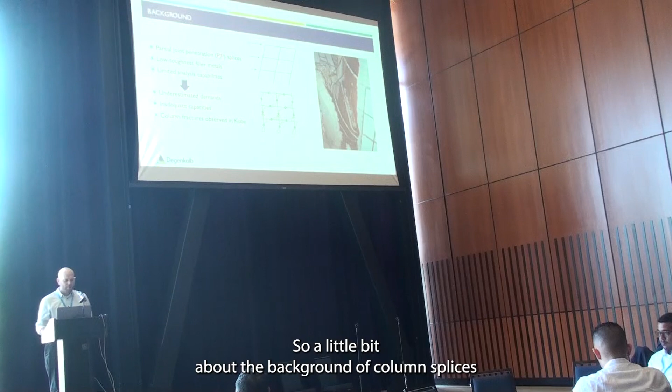Some background on column splices and why we're interested in evaluating them: prior to the 1994 Northridge earthquake, there were very few requirements in the building code for these connections. As a result, engineers provided the most cost-effective solution to create these joints, which resulted in partial joint penetration welds between the flanges and the webs.

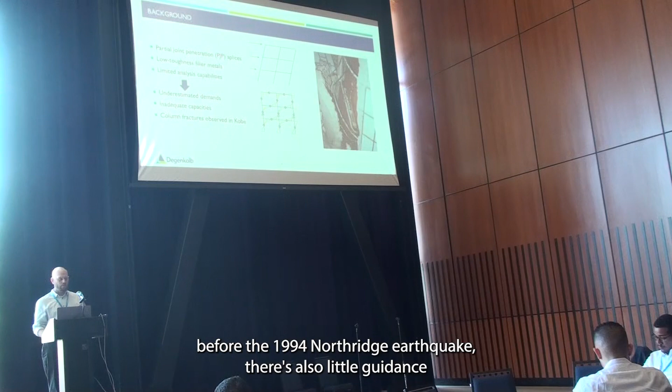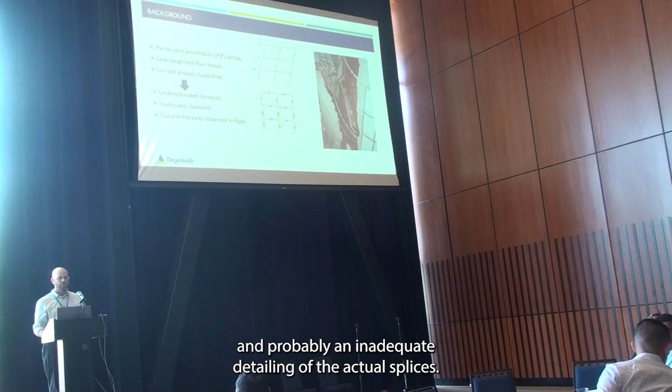Since there were few code requirements before the 1994 Northridge earthquake, there was also little guidance on the toughness requirements for the filler metal. The combination of those two things likely led to inadequate detailing of the actual splices.

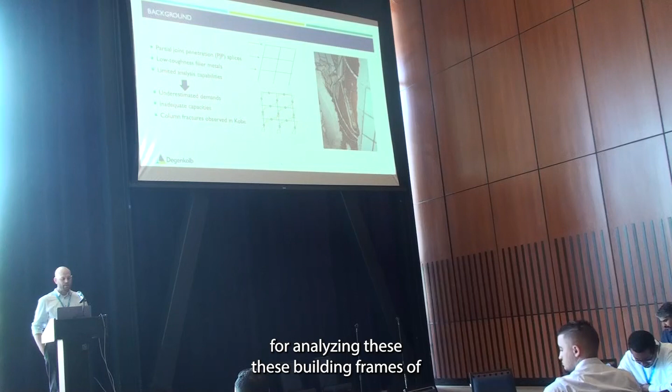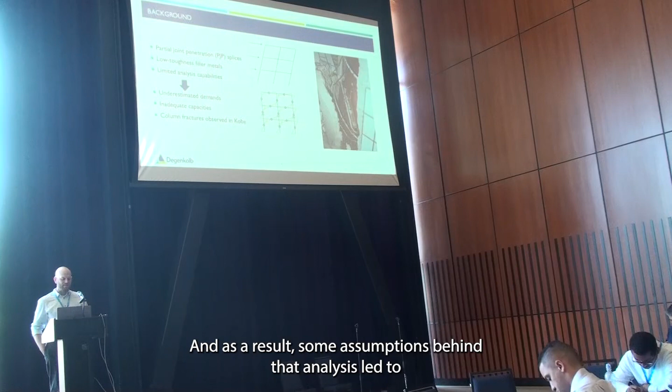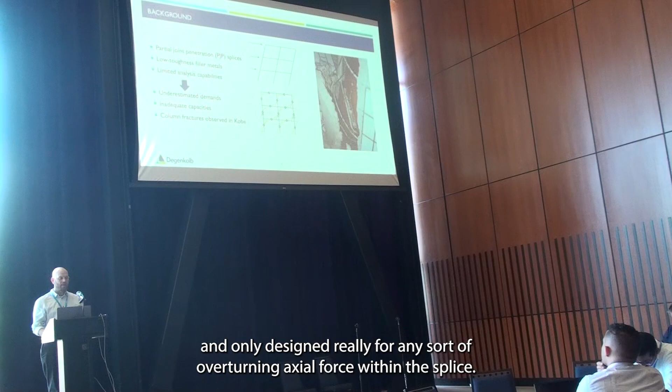For earlier buildings, prior to the availability of commercial software packages for analyzing building frames, approximate methods like the portal method were used to design these frames back in the 1970s and 1980s. As a result, assumptions behind that analysis led to splices being located at inflection points to minimize flexural demands across the splice, and they were only designed for overturning axial force within the splice joint.

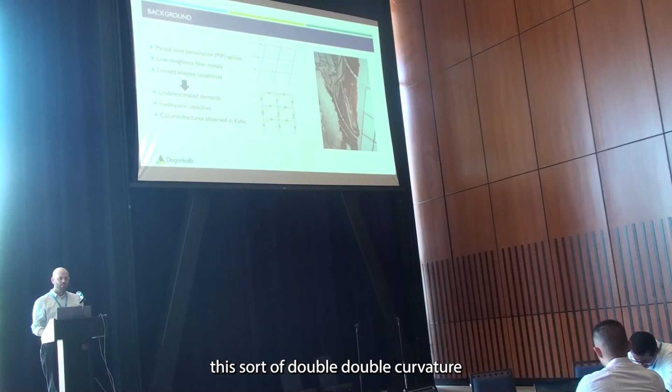Research has shown that, especially in larger, taller buildings, this double curvature assumption in the frames may not be accurate. There could be cases where a column undergoes single curvature, and the splice would have large moment demands at the joint.

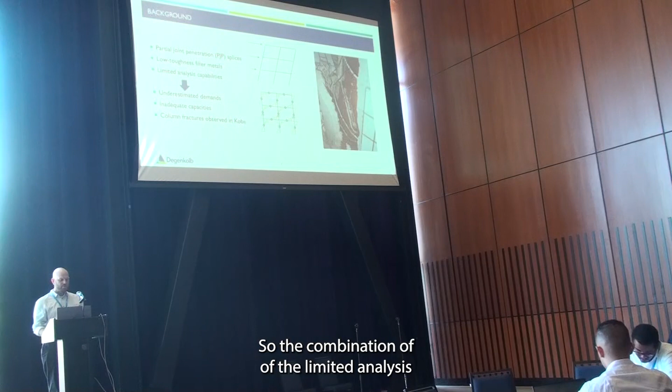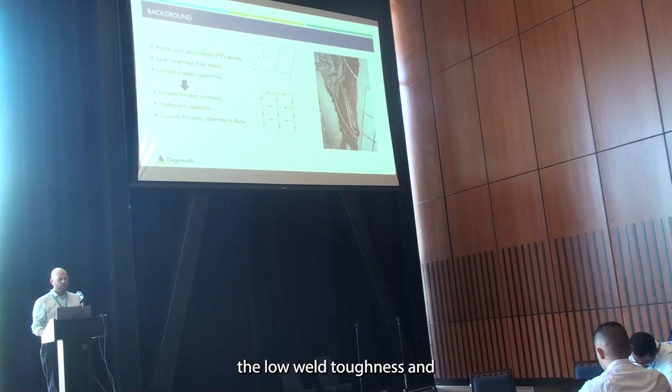So the combination of the limited analysis capabilities used previously, along with low weld toughness and limited capacities provided at these joints, results in brittle fractures at these connections when they undergo strong ground shaking. This has been observed in earthquakes like Kobe in 1995.

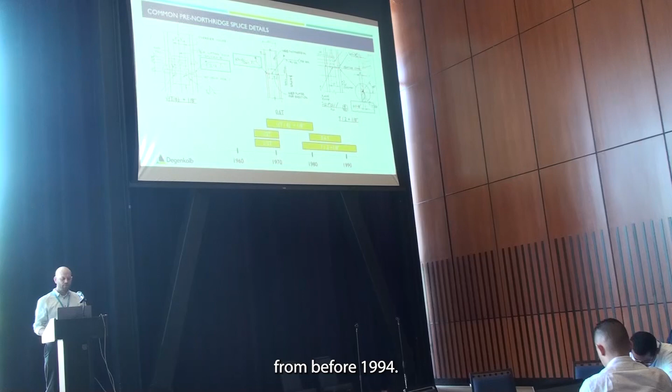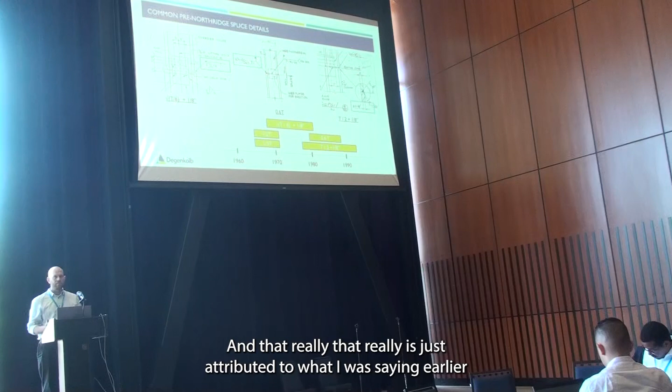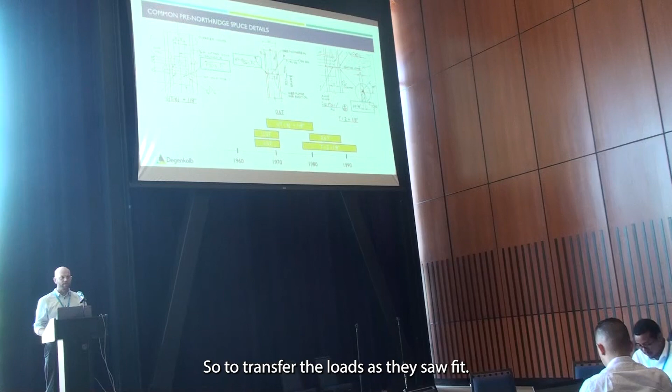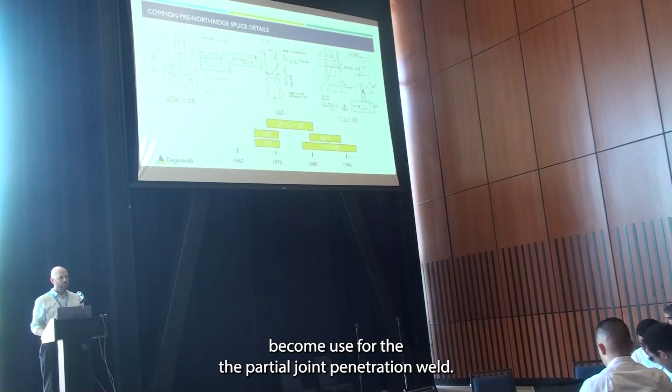This slide highlights what we see when we look at existing building drawings from before 1994: a lot of variability in the detailing of how these partial joint penetration welds were done. That's attributed to there not being a lot of specific guidelines behind these connections, so engineers could choose how they wanted to detail them to transfer loads as they saw fit. At the bottom of this slide, I illustrate a rough timeline of when different details become used for the partial joint penetration weld.

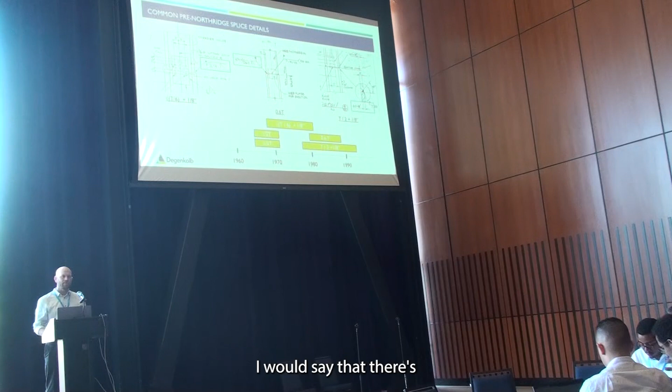This timeline might make it look like there's a somewhat clear break between different detailing uses, but really there's not a lot of consistency between decades in terms of what type of detail was used.

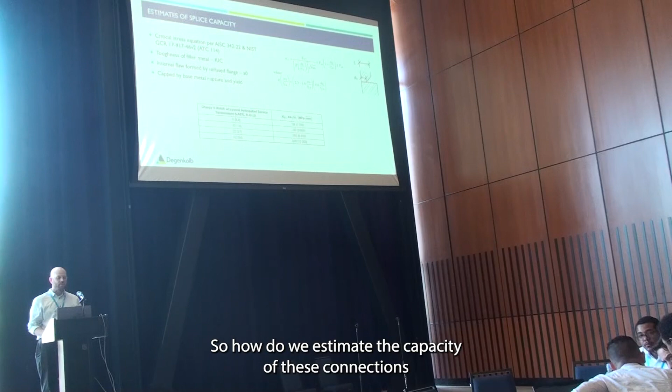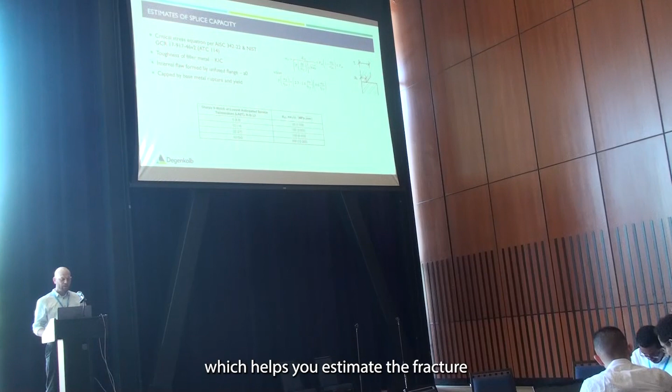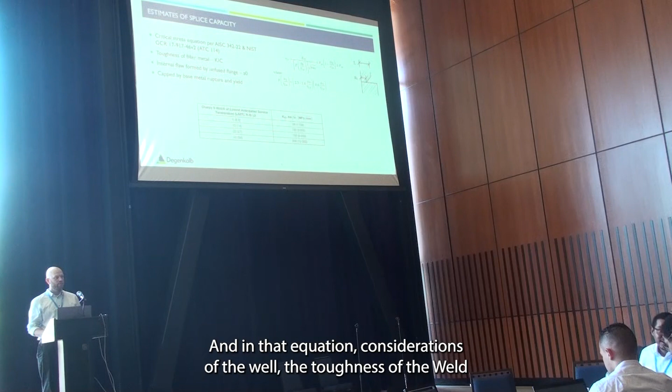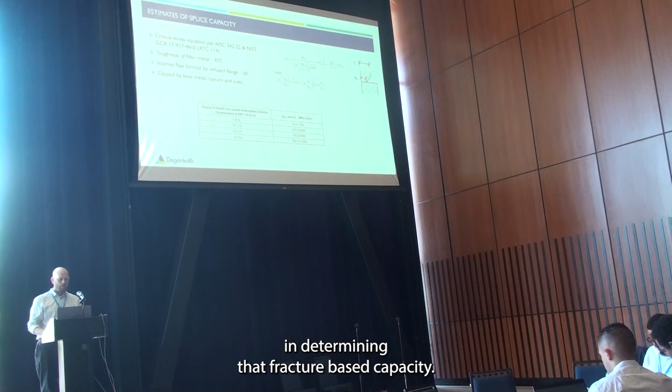So how do we estimate the capacity of these connections? In recent studies in ATC 114, and now in the new AISC 342 code, there's a critical stress equation that helps estimate the fracture strength of the PJP weld. In that equation, considerations of the toughness of the weld filler metal and the fracture mechanics of having an internal flaw by the unfused flange are considered in determining that fracture-based capacity.

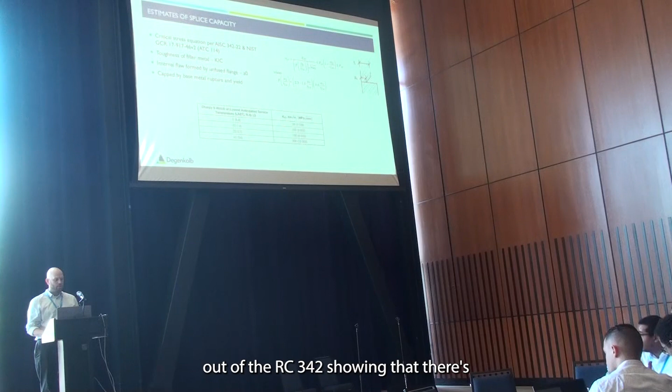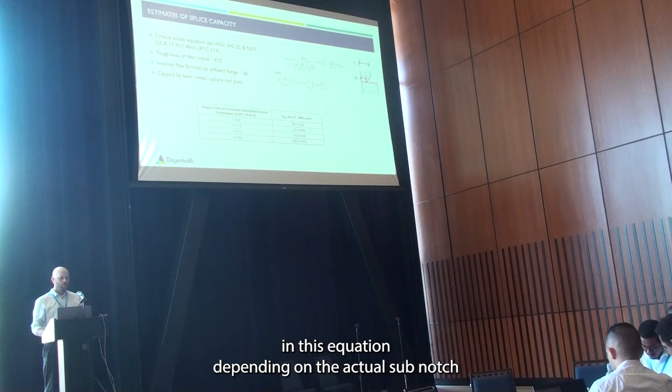The critical stress is then capped by more traditional weld type capacities used in design, where you look at base metal rupture and base metal yielding of the section. This table, directly from AISC 342, shows there's a lot of variability in the toughness value used in this equation, depending on the actual Charpy V-notch toughness value found in the building.

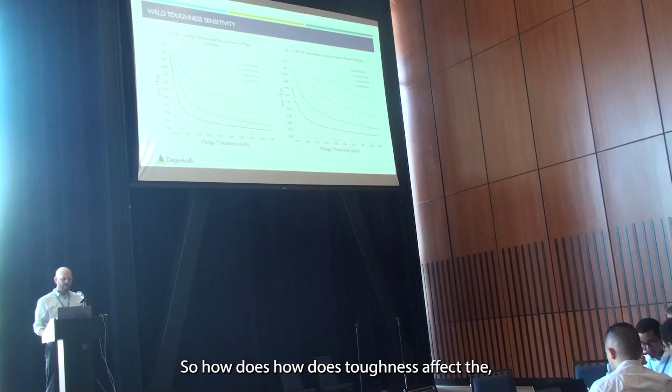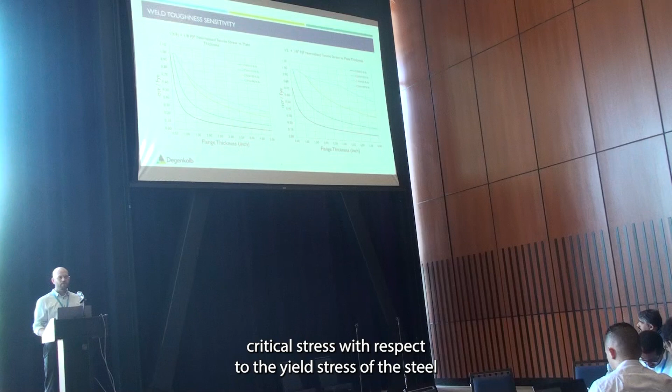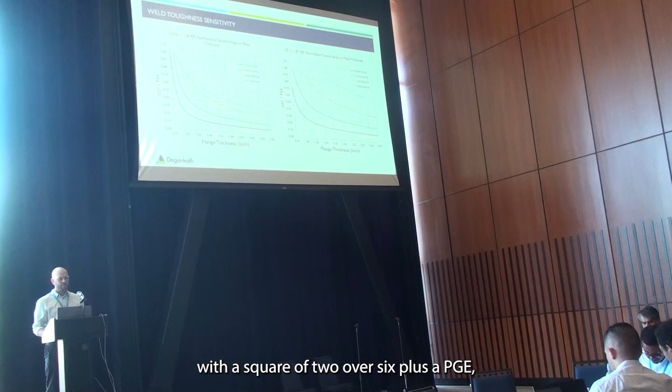So how does toughness affect the actual strength of these connections? On these two plots, I've plotted the normalized critical stress with respect to the yield stress of the steel for varying flange thicknesses. The plot on the left is for a joint detailed with a square root of T over 6 plus an eighth PJP, and the one on the right is for a detail using T over 2 plus an eighth inch weld.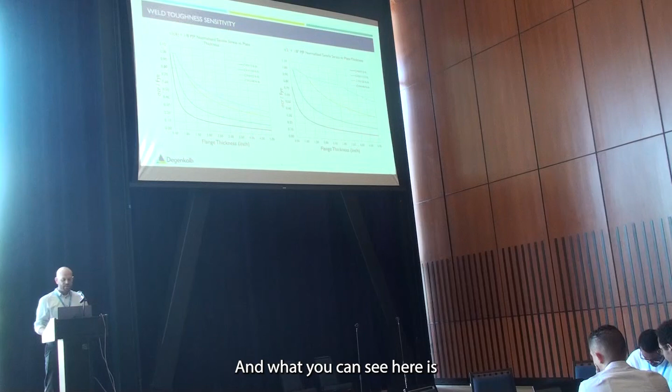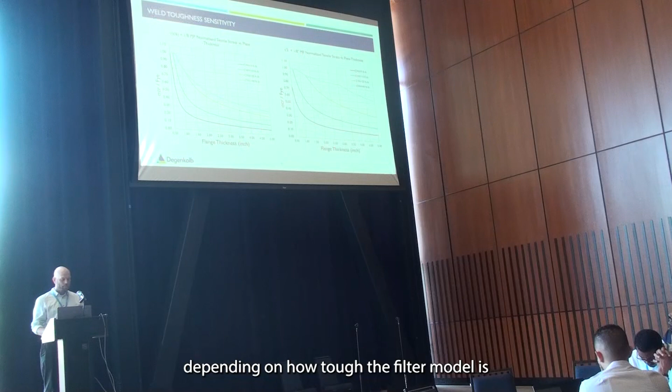What you can see here is there's a lot of variability in the capacity of the actual welds, depending on how tough the filler metal is. It could be a factor of 4 between the lowest and highest values of toughness.

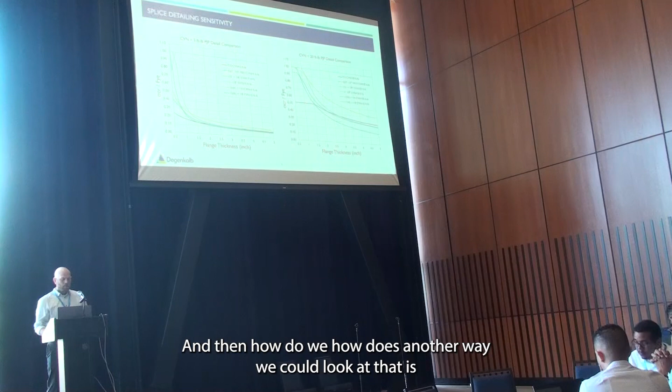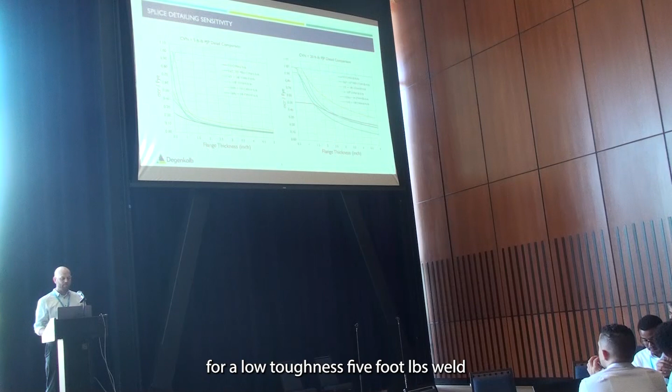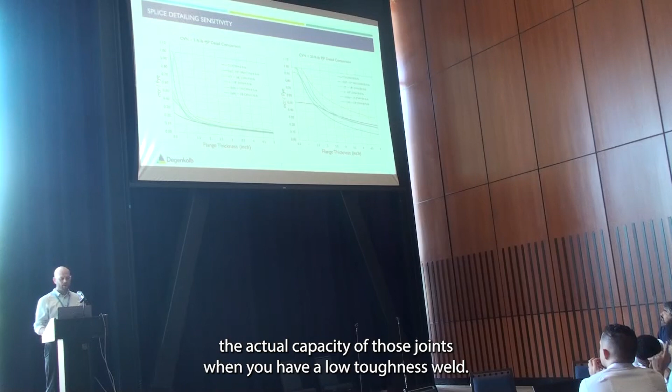Another way to look at it: how does the actual joint detailing affect the capacity of the connections? Does detailing matter if we have a low toughness weld? On the left, I show different types of PJP joint details with their critical stress for a low toughness, 5 foot-pound weld, and there's really not much difference in capacity between those joints. However, when you get into welds with higher toughness, shown in the graph on the right, you do get some improvement based on the detailing in your capacity.

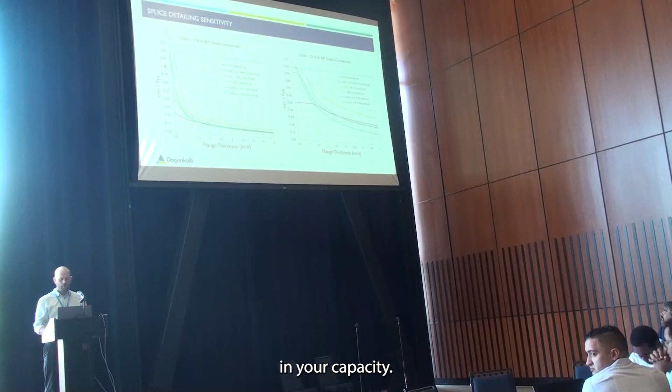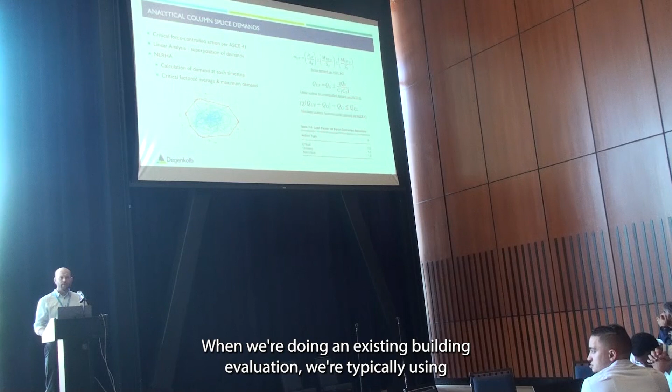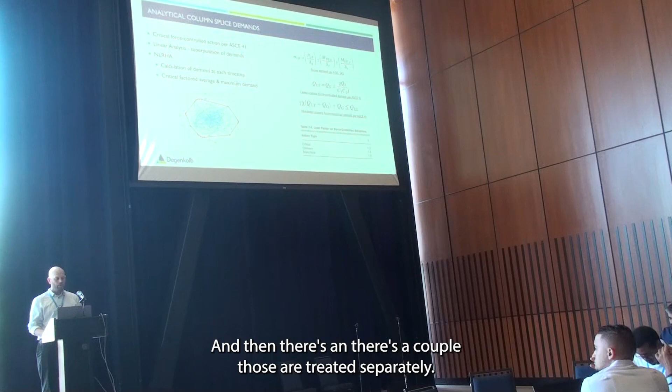So how do we determine and analyze these connections in our modeling? When we're doing an existing building evaluation, we're typically using ASCE 41 to do that evaluation. In ASCE 41, these connections are treated as a critical force controlled action, and those are treated separately than deformation controlled actions.

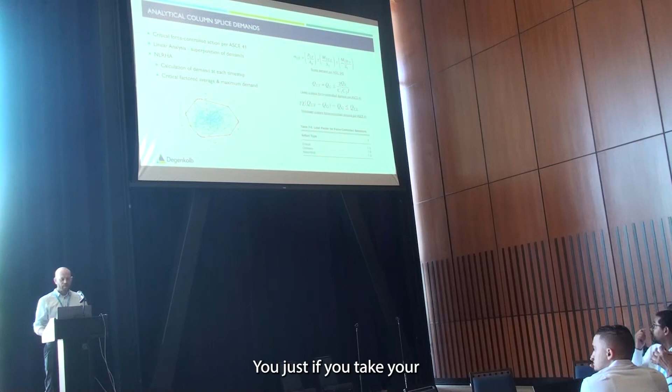In a linear analysis, it's pretty straightforward to determine the critical demand. You take your gravity and seismic load combinations and just do a superposition of the demands at each column splice.

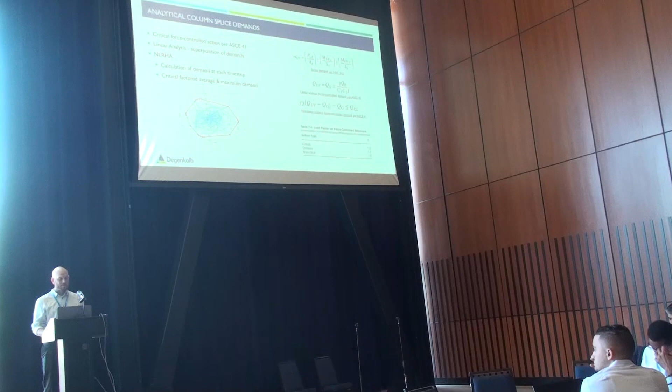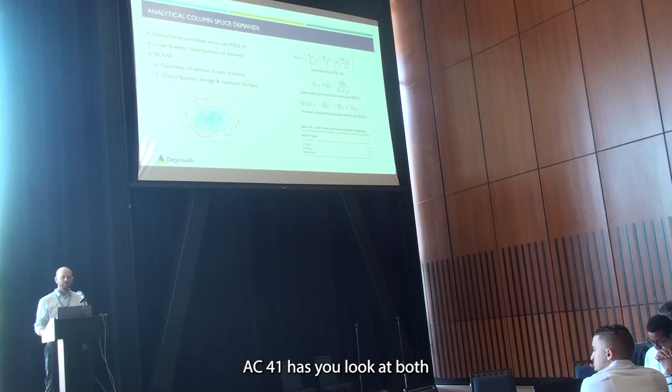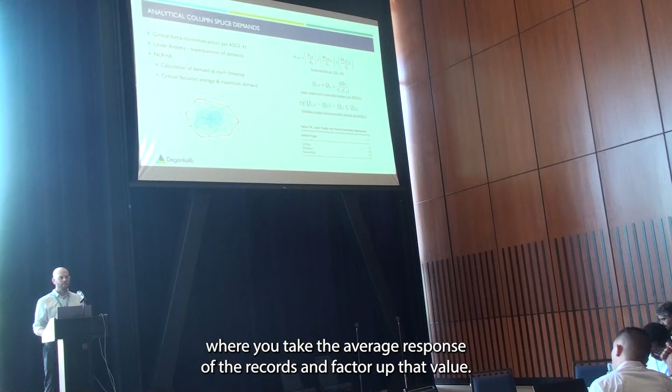However, if you start looking at these connections in a nonlinear response history analysis, the way you calculate it differs. ASCE 41 has you look at both the maximum demand in these connections from ground motions, and it also has you look at what's called the critical factored average, where you take the average response of the records and factor up that value, and you look at the worst case out of those two.

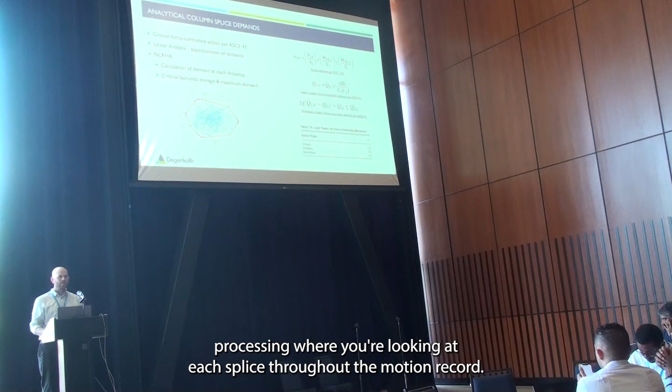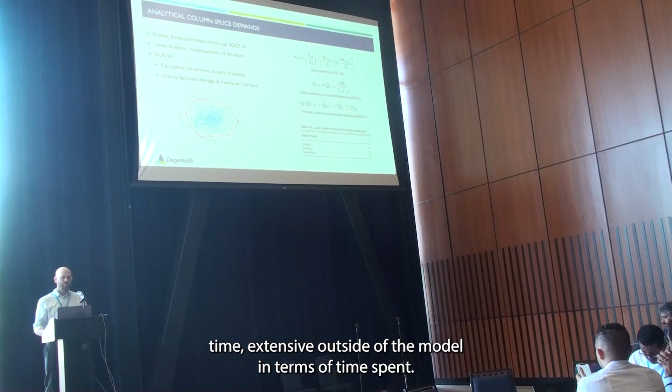So as you can imagine, in a nonlinear analysis, if you have a large building with dozens of column splices, and you're running 11 ground motions, you just start having to do a lot of data processing where you're looking at each splice throughout the ground motion record. And that can be pretty extensive outside of the model in terms of time spent, and it can use a lot of resources in terms of data hard drive space.

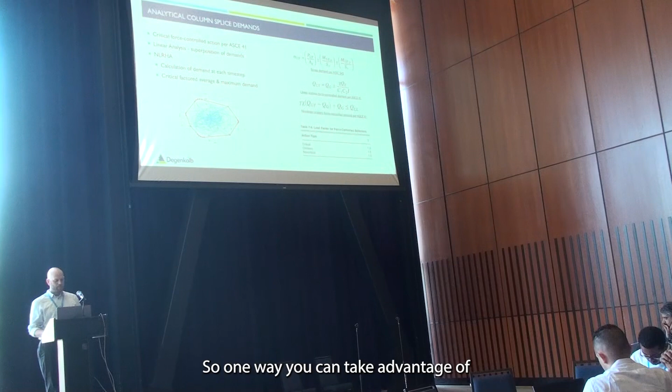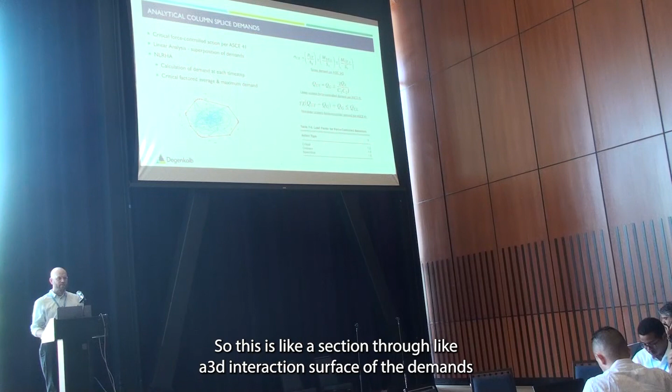So one way you can take advantage of reducing the amount of space and the amount of different time steps you have to check is you can create these orbit plots, which are like a section through a 3D interaction surface of the demands seen by a column splice in the model.

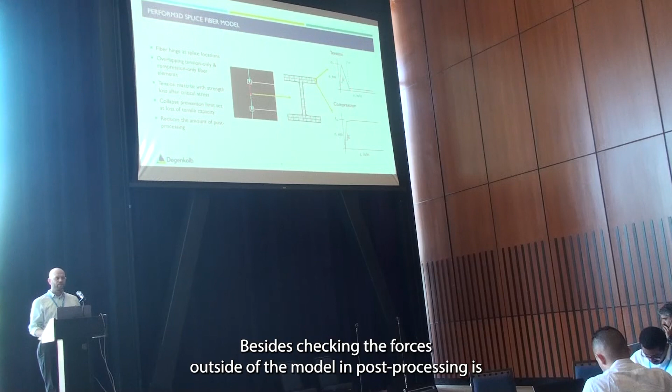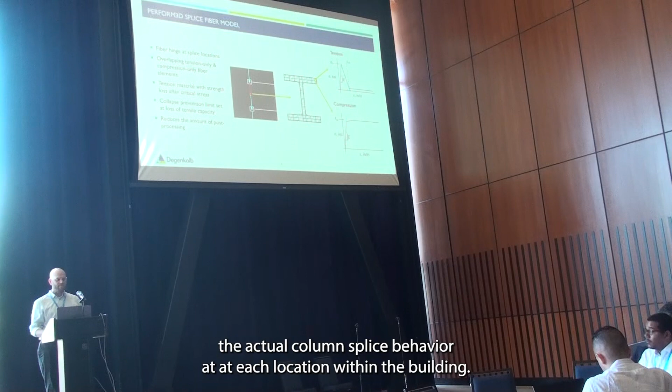An alternative method that we employ besides checking the forces outside of the model in post-processing is we follow the ATC 114 recommendations for creating a fiber hinge that represents the actual column splice behavior at each location within the building. To achieve this, we create a cross-section and discretize it into overlapping fibers.

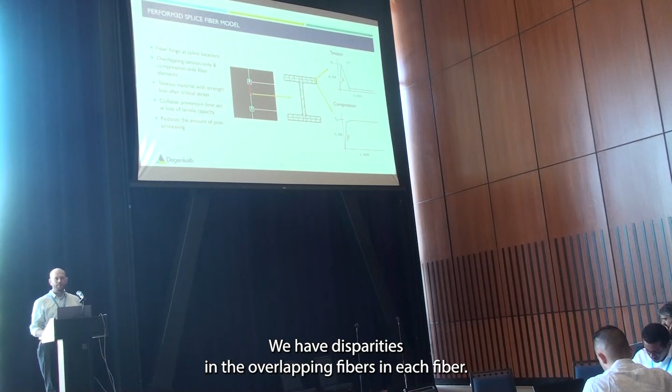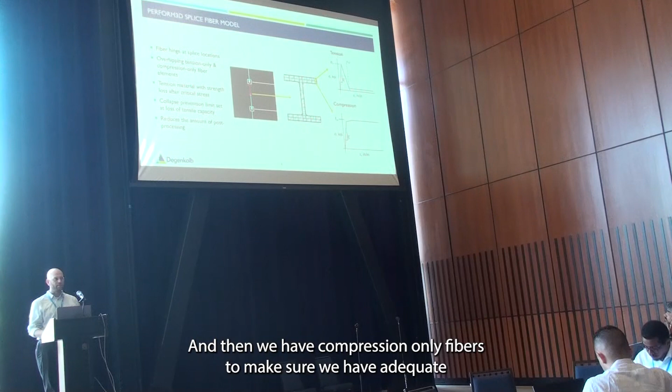Each fiber set includes tension-only fibers that model the fracture mechanics of the steel material and the weld, and compression-only fibers to make sure we have adequate bearing and support after we see rupture in any of the tension fiber elements.

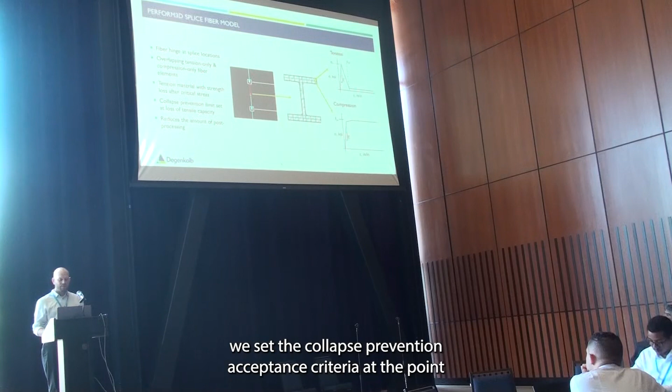The tension element is capped at the critical stress determined from the equation shown previously. When we're looking at acceptance criteria for ASCE 41, we set the collapse prevention acceptance criteria at the point where the residual stress is hit, and base all of our other limits thereafter before that point.

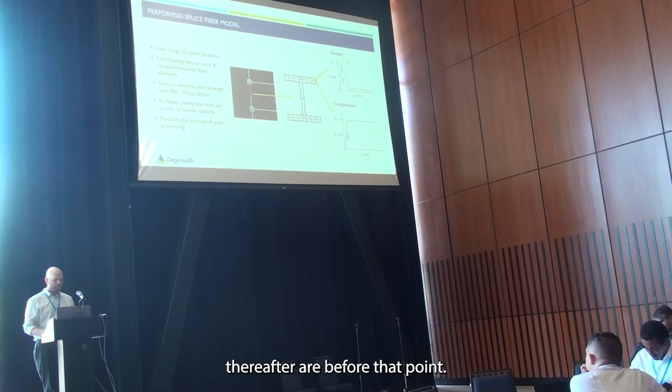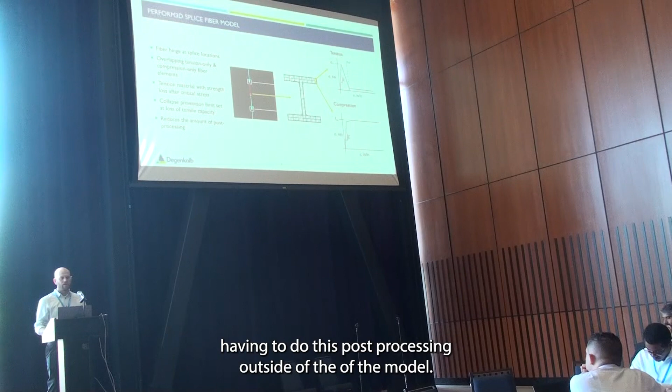The advantage of doing a model like this with fiber elements at these locations is it eliminates having to do this post-processing outside of the model, which takes a lot of time and can use a lot of space on your computer.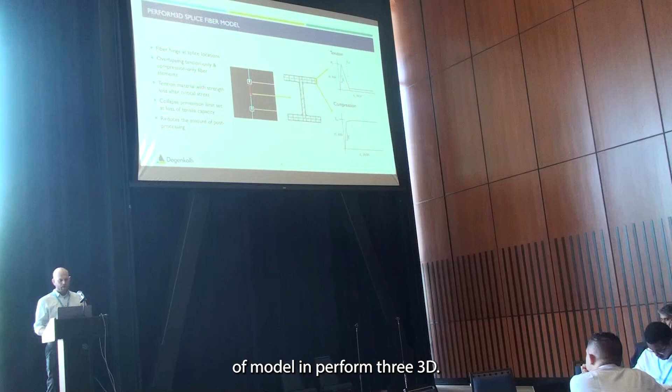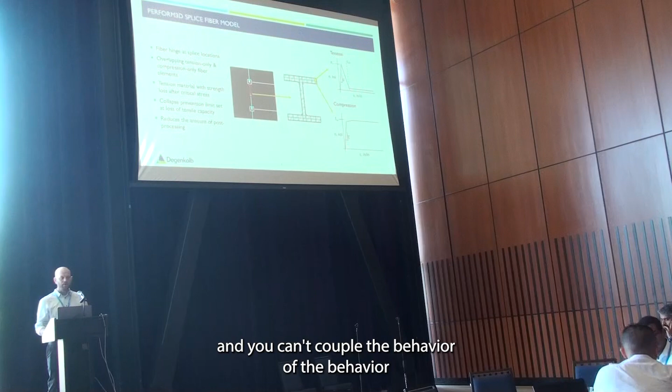One disadvantage of using this type of model in Perform 3D is you're only allowed to do 60 fiber elements, so you're limited in how finely you can discretize your cross-section, and you can't couple the behavior of the axial fiber with, say, the shear behavior of the column.

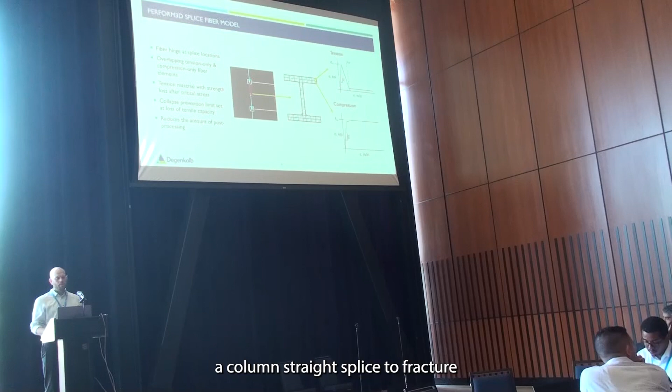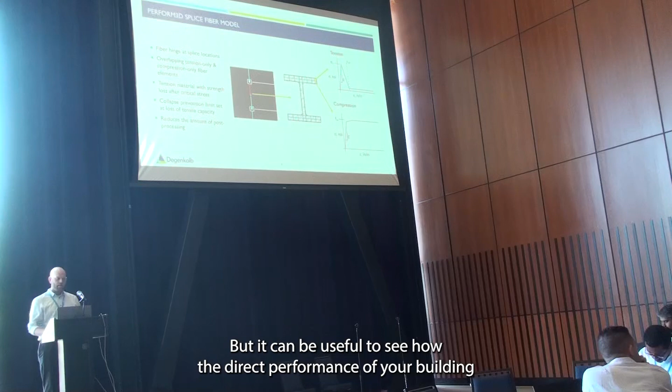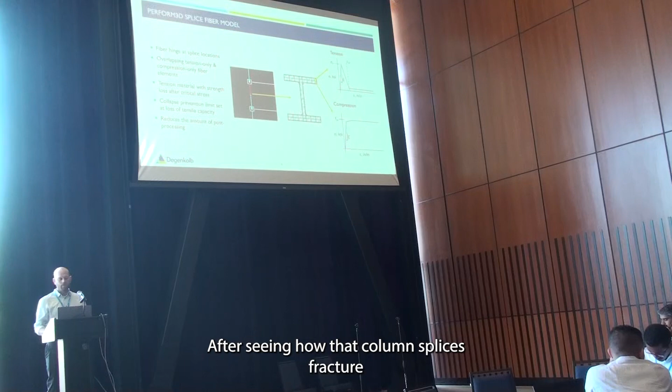So if you find in your analysis that you're expecting a column splice to fracture during a ground motion, you'll still be able to transfer shear through that column in the analytical model. But it can be useful to see how the drift performance of your building and what secondary mechanisms may form after seeing how the column splices fracture during an analysis.

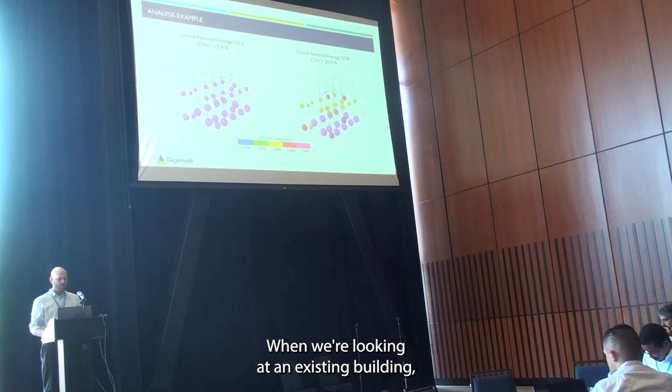This is an example of the types of studies we end up doing when looking at an existing building. Since there's so much variability in the capacity of these connections based on the weld toughness, we end up trying to bound our analysis by looking at different toughness values to see how that would impact the recommended solutions we provide to our client.

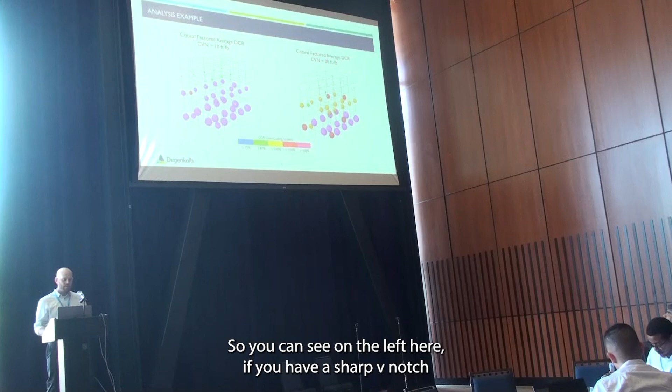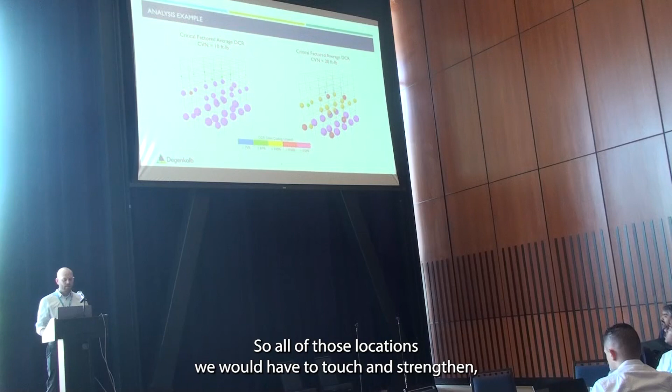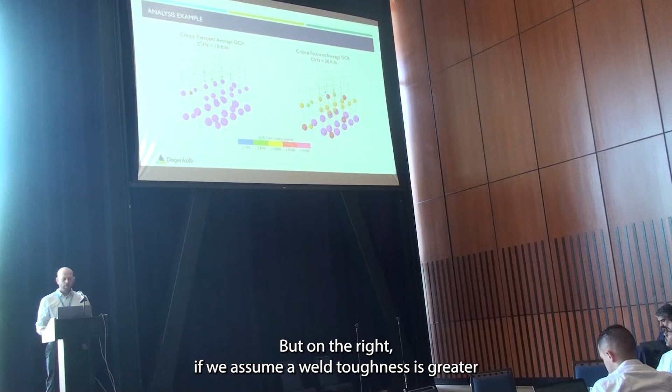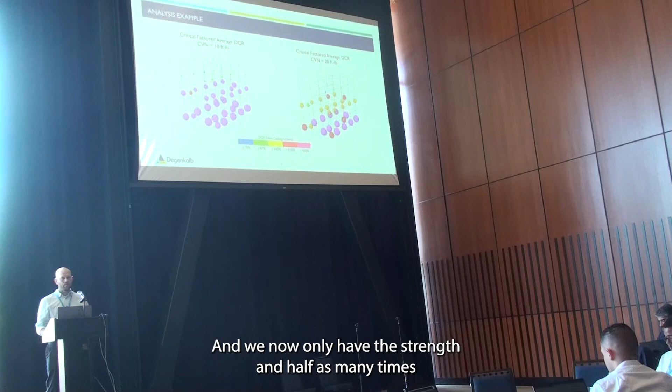You can see on the left, if you have a Charpy V-notch toughness of 10 foot-pounds, the bubbles in purple represent the critical factored average DCR from an analysis. All of those locations would have to be touched and strengthened, which is approximately two-thirds of the entire splices in the building. On the right, if we assume the weld toughness is greater, on the order of 20 foot-pounds, that more or less eliminates the strengthening in the upper floors, and we now only have to strengthen half as many columns as in the 10 foot-pound case.

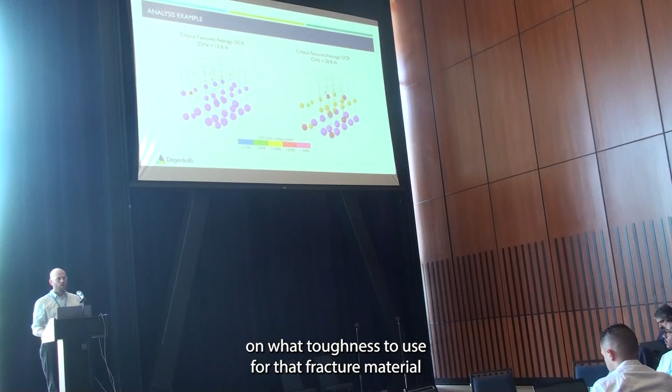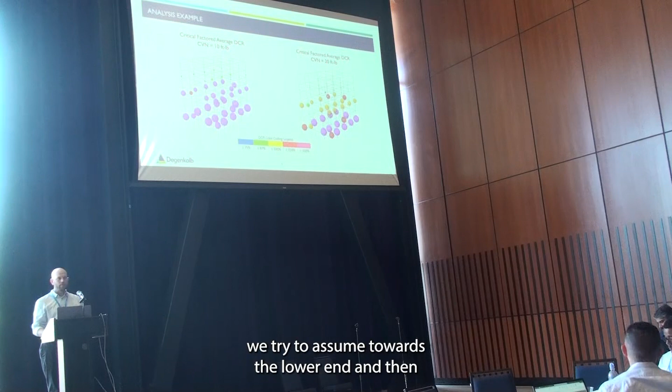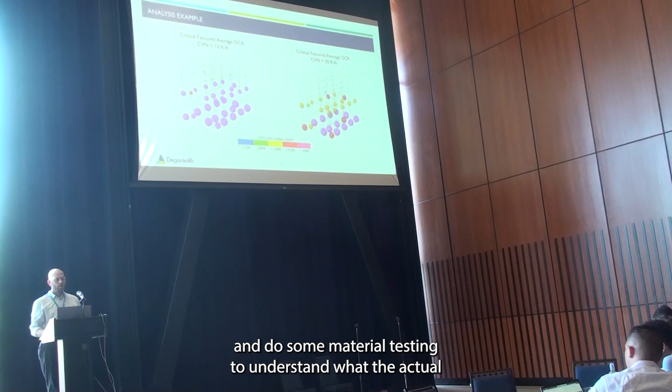So it's really critical to try and nail down your assumptions on what toughness to use for that fracture material when determining the capacity of your fiber hinge model. Oftentimes when we go into a project, we try to assume towards the lower end, and then if design progresses, we try to do some material testing to understand the actual strength of the welds, and then we can refine our model and try to reduce the scope of our work.